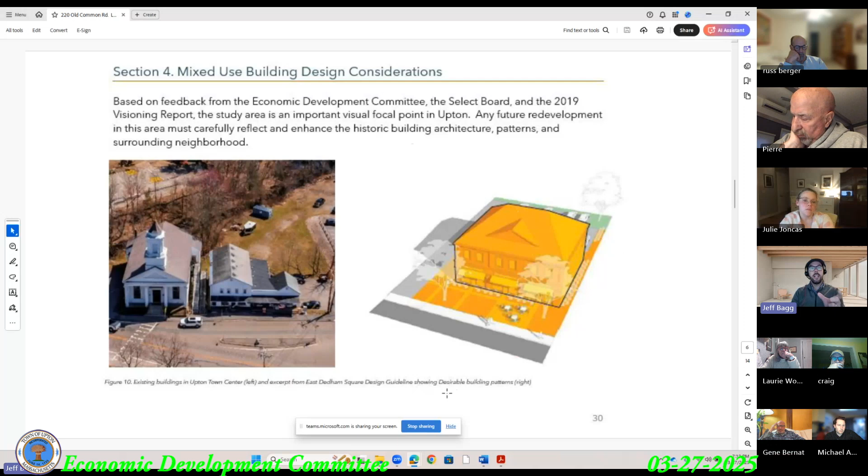The building architecture, the patterns, where the buildings are potentially located, and how they interact with the surrounding neighborhood. We're finding some really good examples of other municipalities who have illustrated guidelines, and we're going to pair them with the written guidelines that Upton has and merge these together to give the basis for, if the town ever wanted to go out to RFP again, these materials could be incorporated or offered to a developer to point them in the right direction.

So the image on the right is just a depiction of a mixed use building. And I'm really a fan of trying to incorporate some of these graphics, because our project will not be providing a 3D rendering of these mixed use buildings, since we all talked about not wanting to go there yet. We're not ready, we're not funded for drawing architectural drawings, and people's imagination can get carried away pretty quick.

But we do want to start to give these examples, so this image will be a little crisper in the final version, but it's a good one that shows how a mixed-use building is set back a little bit to offer active space out front.

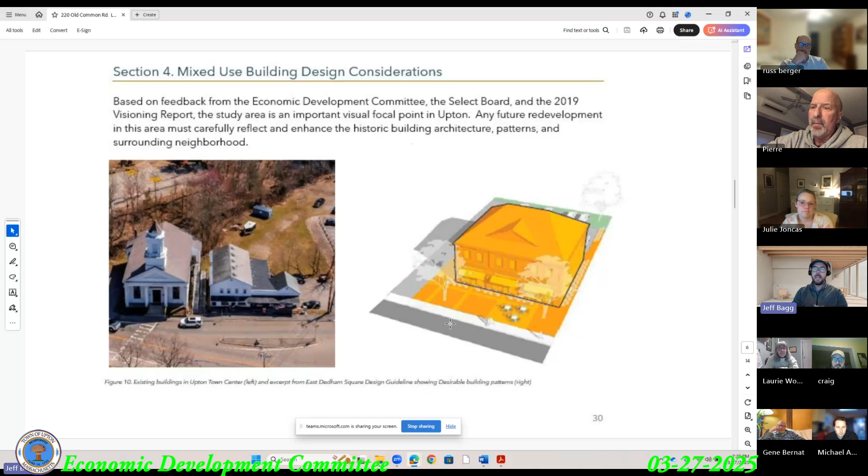I'm trying to pull some examples of something that helps articulate what a mixed-use building is at 2 stories, and many of the examples I'm finding are 3 stories and higher. So I did like this image that shows a 2-story mixed-use building, it starts to identify some of the features. I'm going to keep trying to find images that really help anchor people as to what we're talking about when we talk about a mixed-use building.

And then on the right, this one talks about how the orientation to the street is really important, how access is going to be important, and things like that.

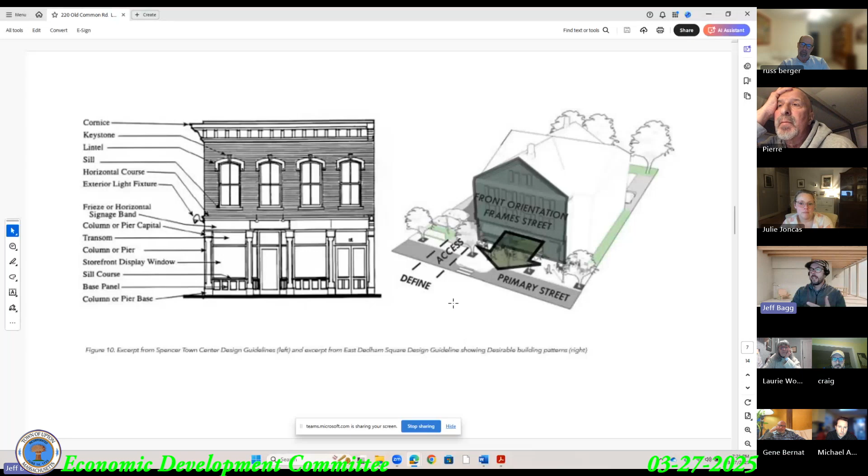A lot of what else is out there for mixed use buildings starts to get to 4 stories really quick, so I'm shying away from those kind of images. And then the last one for the mixed use building is kind of this active ground floor narrative that I think we all talked about embracing, and how the building really has to be built that way. The active uses on the first floor allow for residential or potentially even offices on the second floor, and we want to continue to show this.

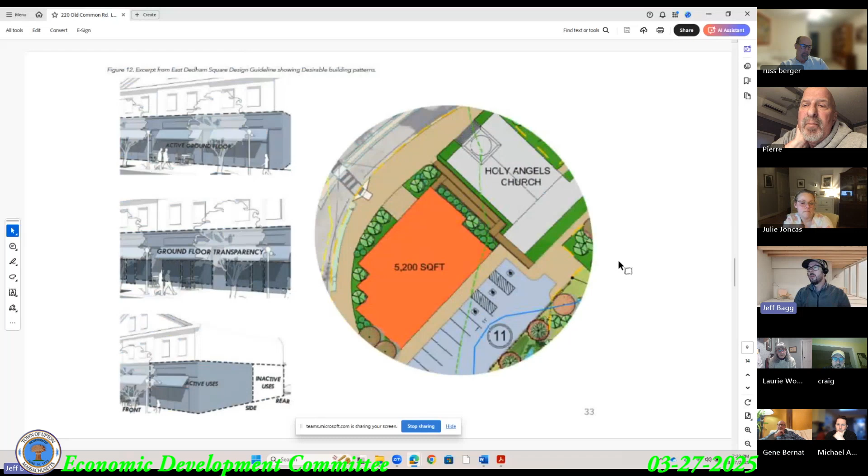And then I'm just trying to draw the comparison of the actual site plan that we're preparing, the concepts, and how these two correlate to each other. So we're going to have some graphic illustrations within the report to help people get to what is a mixed use building. And then two more design considerations, and then I'm done for discussion.

But some parking lot design considerations. I think I showed the image on the right before, but this is a really good graphic for the Grove Street parking lot because it has a lot of similarities in terms of its location next to the road. I'm pairing it with an image of Grove Street to the left. I'll get a better picture next time we're out there that's on the same plane, so you could really compare and contrast these two.

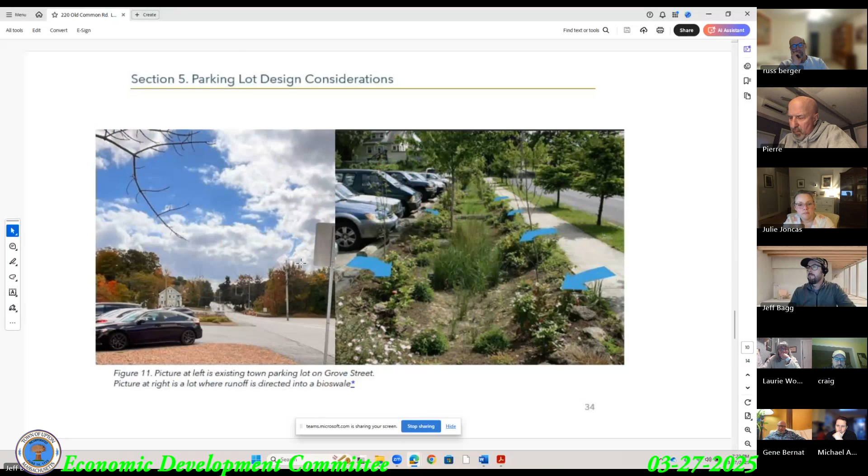Because of my familiarity with Easthampton, this is a project on the left in Easthampton that did a green infrastructure master plan. They had this conceptual renovation of a town-owned parking lot where a bioswale was inserted in the middle, while preserving all the existing parking spaces, as a way to green the space and better handle stormwater. This image will be crisper, but it shows this is common for municipal parking lots to bring in these components. I'm pairing it with how our graphic will look, with the municipal parking lot potentially being expanded and the bioswale there.

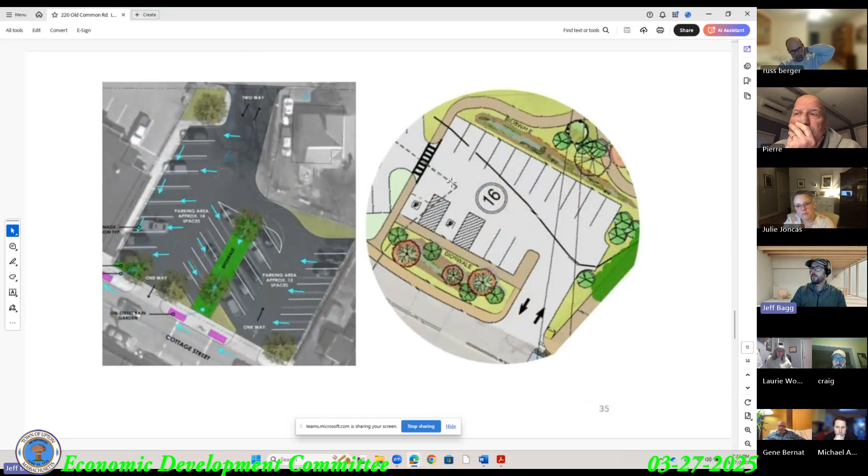And then finally, this concept of the trail running alongside Center Brook and coming back out on Grove Street. Given that it's close to the resource area, I think imagining it would be compacted gravel surface, which is actually more and more common in terms of being low impact to resource areas, but also providing ADA accessibility. Some of what we'll look at is different levels of ADA. There's some Forest Service standards - the state's park grant program will fund projects that meet the Forest Service, which allows for a little bit steeper terrain.

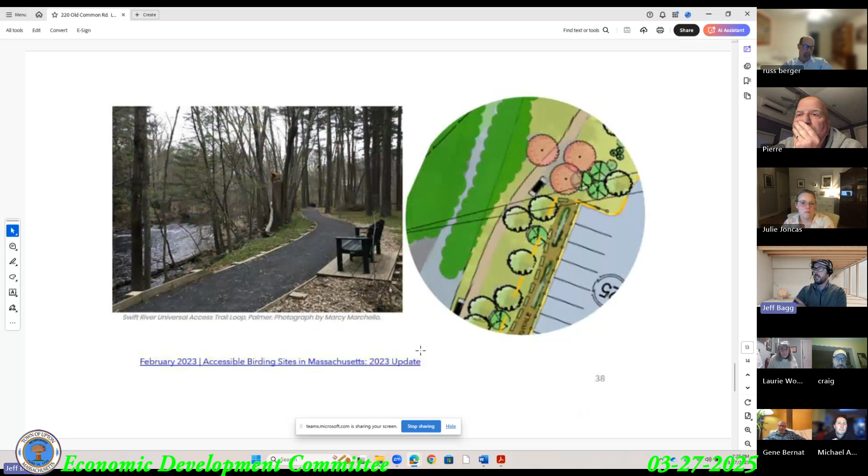I'm just trying to pair it with that section of the site plan, which shows the proximity to Center Brook with a bench in the viewing area.

So with that, that's what I have for tonight, and I'm happy to have any discussion or hear comments from the committee, and then just that approach to select board, as an introduction of what BSC has been working on.

Yeah, Jeff, I had a question regarding the parking, the slide you showed for the parking behind the arcade block. So that was assuming the town purchased that arcade slice of land, I think. Right, I think that's a good question. I think it could be a bunch of different scenarios that could allow that. That could be if the Thompson block or the arcade block stayed in private ownership, and someone wanted to pursue that.

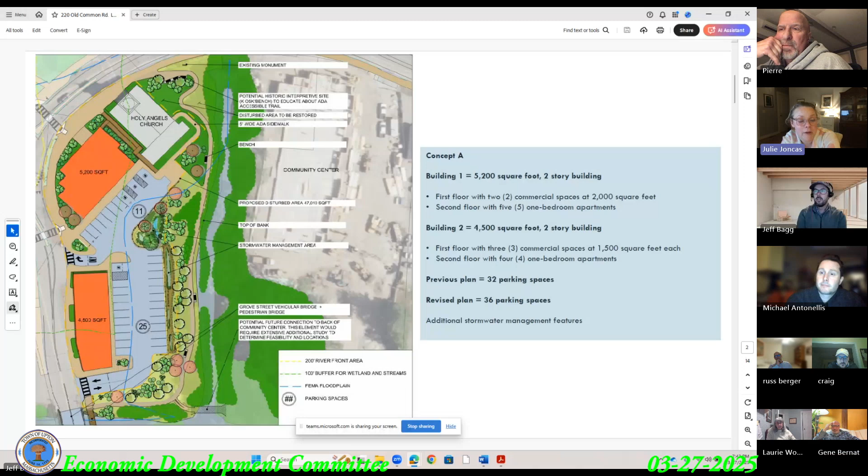Okay, I like A, and I like C if you want to flash to C, just so Craig can know that bearing. But with that one, I feel like it's more achievable, but again it fully relies on cooperation from the owners of the arcade block. But yeah, I'm for either one. So if we go around and see where everyone is, you could really sway me either way, truthfully.

Well, I don't think they're mutually exclusive. I think that, from my perspective, in C there's still the opportunity to do a building at the front and not have a significant net loss in parking. That's a very good point. Okay, Pierre, what are your thoughts?

I like the concept of C and A also, because it looks a little less cluttered along Grove Street at the back end of it. I also see the merit in having the second building there.

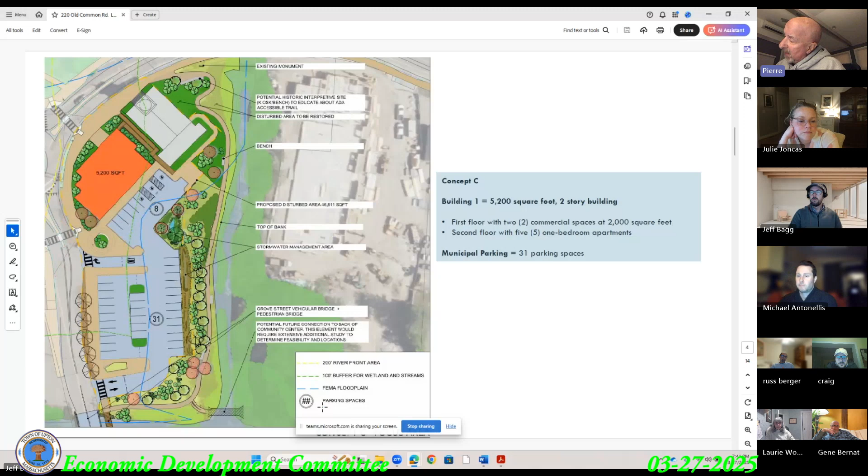But I'm really torn with being able to make any sort of a judgment without understanding the financial feasibility of retaining Holy Angels versus needing to remove it, because it's just too costly to try and rehab it. So I think until that gets decided, for me personally, it's up in the air, because if you're putting a big building up at the top where Holy Angels and building one concept is, not 5,200, I think it exceeded that.

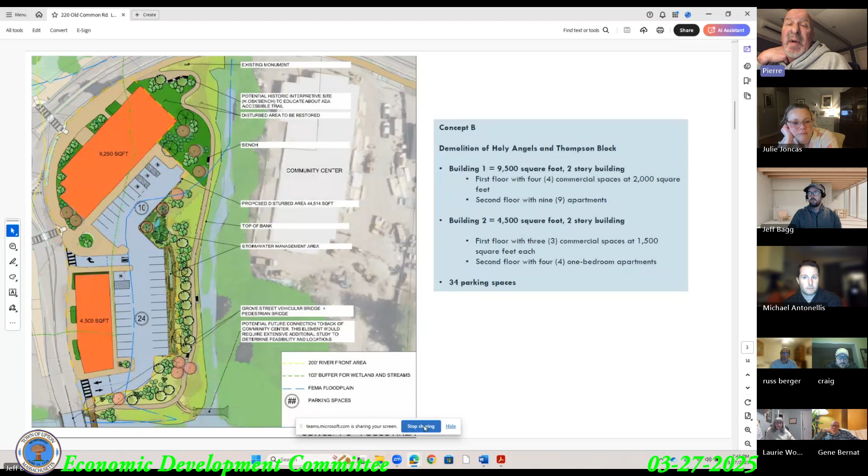A 9,500 square foot building up there, and put some decorative historical elements to the facade so it retains the look and feel that we're going for, but for less money, you're getting more bang for your buck. So I think without really understanding what the number is for Holy Angels, it leaves me in a quandary as to which one is the best solution.

Yeah. Well, as I said, I think in the last meeting, Holy Angels is an impediment to making decisions, as you're pointing out. So it's beyond our control at this point.

Russ, could you weigh in on your thoughts, please? Well, I guess back to the thought, I prefer B, because I'm not as attached to Holy Angels as most people are, just from the standpoint of developing the area and making it look right, and trying to build that smaller building on Grove Street.

I think it's going to be difficult just from a financial standpoint to get a developer to build a building that small, with that small footprint. So the larger building would probably be easier to get built. And the more parking, the better. I don't think we can necessarily bow to the brewery, since who knows if it's even going to be there by the time this is built. So to take that into a lot of consideration doesn't really make sense.

I mean, those buildings themselves, it's for sale. He's trying to keep, I think, a 5-year lease there, once they sell it. So who knows if that's even going to be there by the time this gets built or developed. And hopefully someone tears that down and builds something with parking. Yeah, seriously.

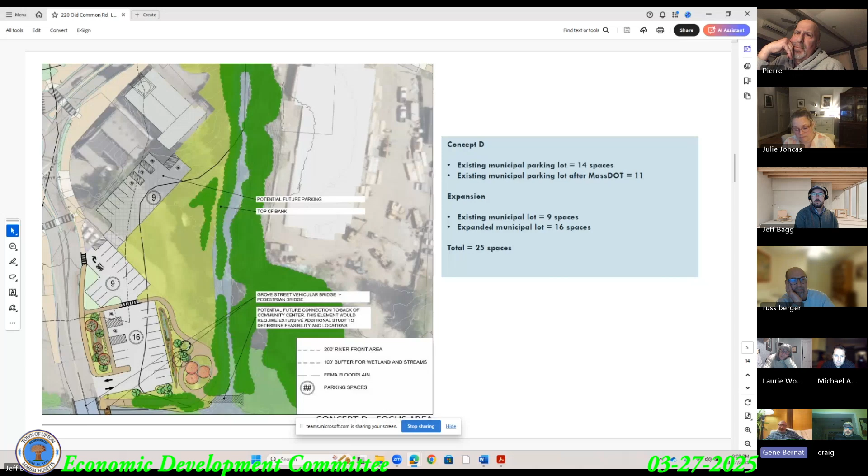Yeah, except I don't know—I just see that this is, for me, speaking for myself, aesthetically the least desirable outcome. Because it still allows Thompson to use that as a storage area for storage containers and other things, whereas a negotiated parking agreement that allows the configuration of A or C gives them those 9 spaces, but gives the town an attractive downtown area.

Well, Gene, what do you find not attractive about this? Because what's shown as green space is actually being used for parking of equipment and storage containers. If you go up into the library and look out towards the center of town, it wouldn't change that perspective much at all. All we'd have is a nice little greened-up parking lot with fewer spaces than we currently have available for use. So I don't think it gets us anything.

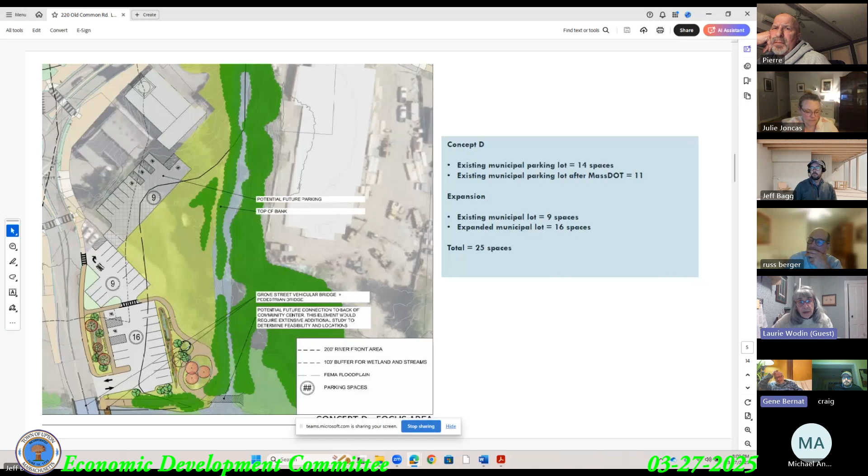I don't know if you'd see the parking lot from the back of the community center. I think you mainly see the back of the church from there, right? No, you see the parking lot—just go into the library and take a look. The other thing is if you go down behind the church now and look at that green space, that low space, that's what this looks like, and it seems like we wouldn't be making any use of it at all. And the other designs are so beautiful.

Can I suggest where we're at with the conversation? It really seems like it's between A and C, mostly. D's been provided, but it's not like an option in lieu of A, B, or C. D is more like a separate thing.

So maybe, Jeff, you're not going to have permitting completely identified with orders of magnitude and cost by April 15th, correct? No, we wouldn't. So I think we just go to the select board with the conversation that we've evaluated it, we've added things along the way, and it's really A or C depending on scenarios that present themselves, but depending on the future we don't have insight into. I don't know, how does everybody feel about that?